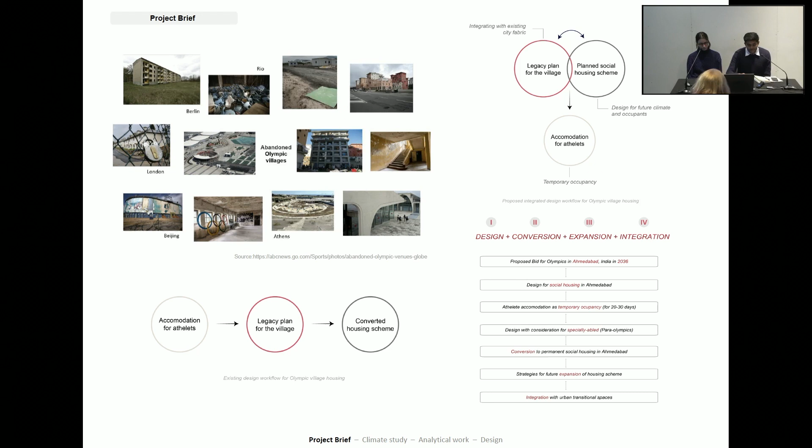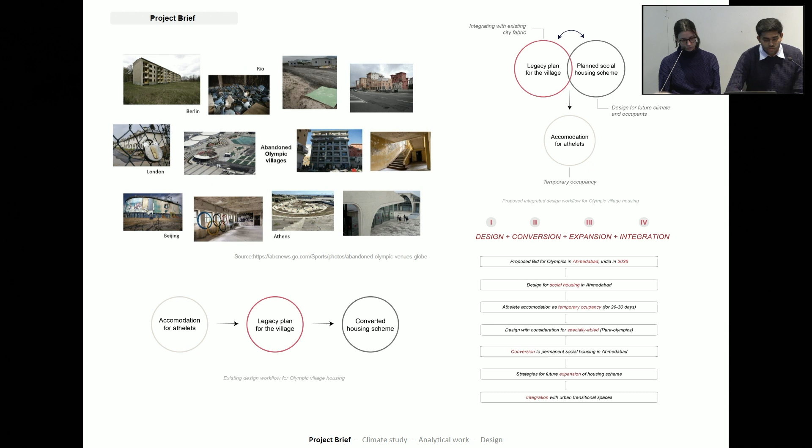I'm looking at Olympic houses as the built example of how they can be built in future, in terms of the legacy plan of the village. There have been some Olympic villages in the past which have been left abandoned post-Olympics. So I'm looking at how the legacy plan can be approached in a different way, wherein the athletes are temporary users, and the planning is mostly done for the people who will use it after the Olympics.

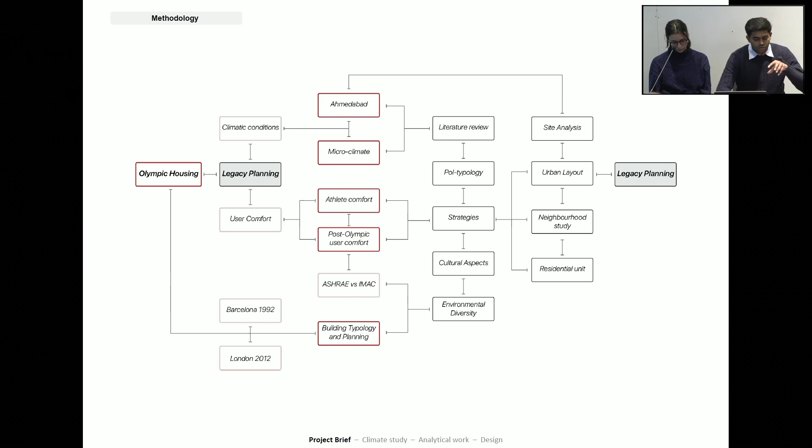So just a brief of the methodology adapted for the research work. There are two kinds of users, mainly athletes and the post-Olympics user, focusing on the urban layout for the Olympic village, going at the building level and looking at how the legacy planning can be done through the process.

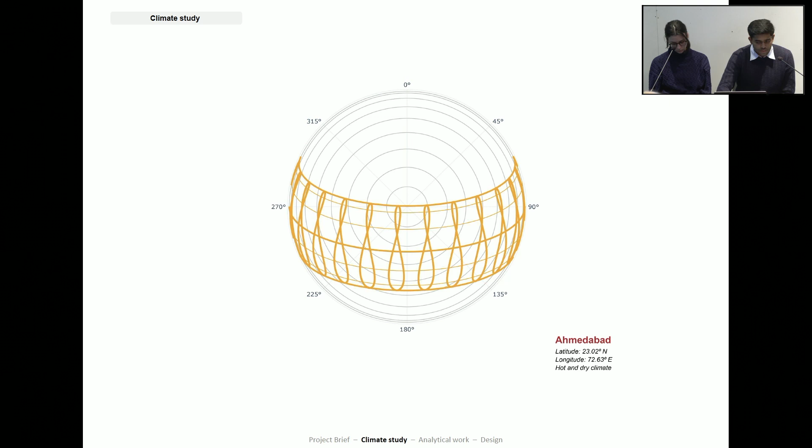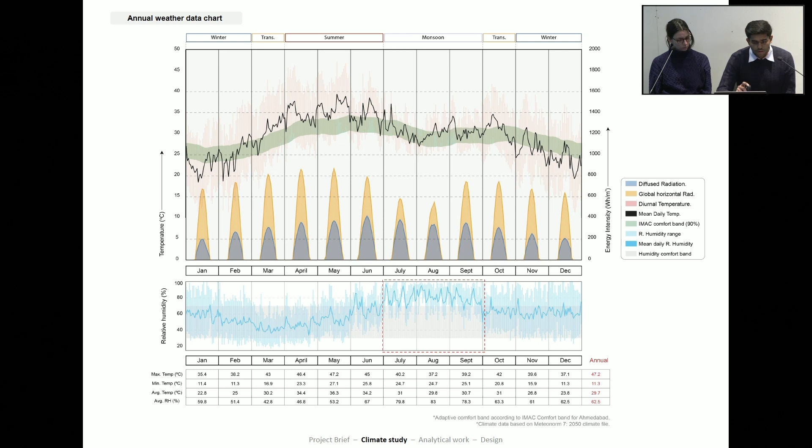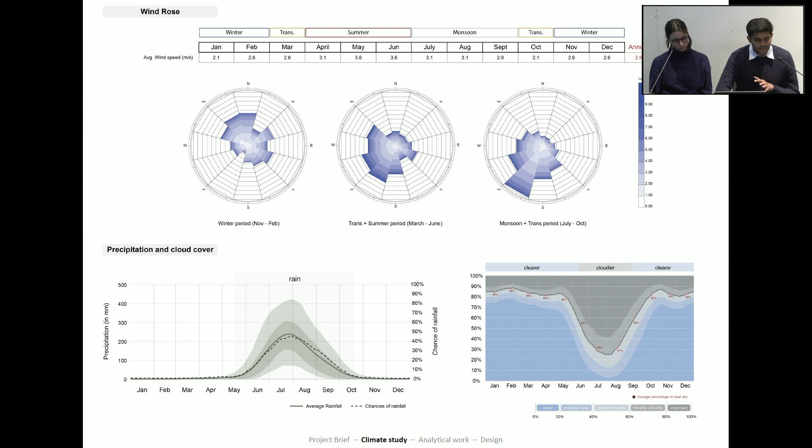The site for the Olympic village has been chosen as Ahmedabad, which is a potential site for the 2036 Olympics. The weather climate of Ahmedabad is mainly hot and dry, with peak summer temperatures during the summer period, and wind comes from the southwest direction during the monsoon and summer period. The climate can be classified into three periods: hot, mild, and moderate.

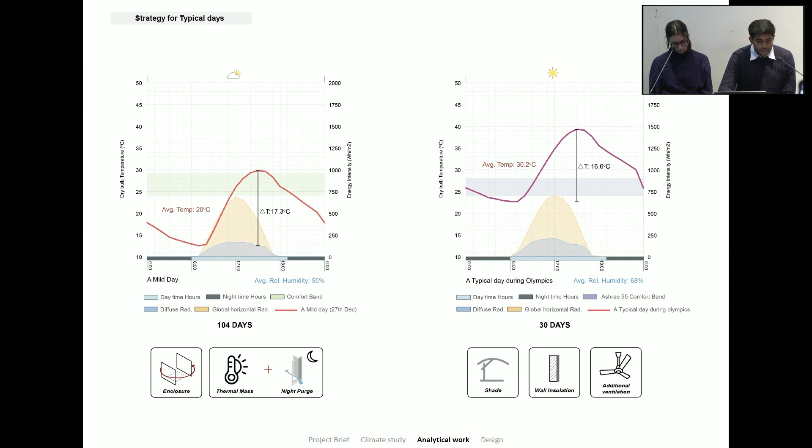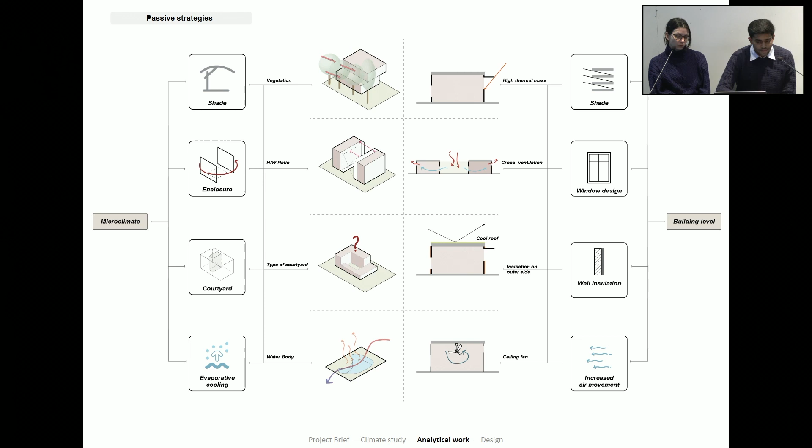For the further approach, typical days were identified for a moderate day, a hot day, and a mild day, and a typical day during the Olympic period specifically. Some passive strategies were identified through the climatic analysis of what can be done at the microclimatic level stage, then moving forward to the building level stage, with shading being an important strategy at the first stage of the design.

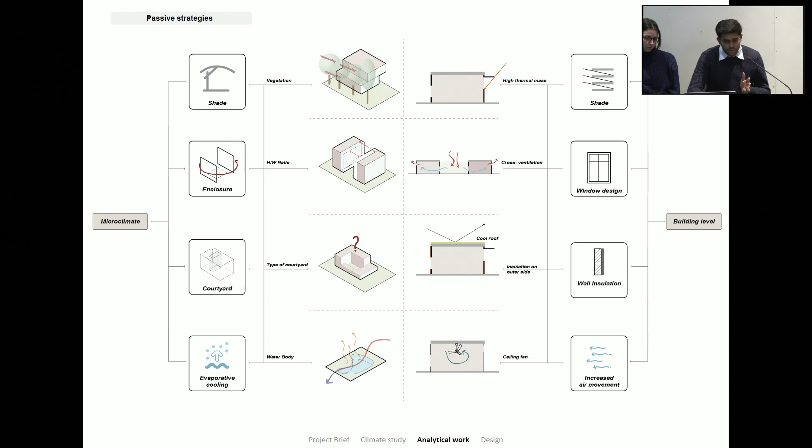Then looking at the users as the main aspect of the Olympic village. The athletes are the users who will occupy the space for a temporary period of 2 months. So I looked upon what kind of thermal environment is required for an athlete, and the wet bulb globe temperature is the scale identified for the adaptive comfort strategy for an athlete, given by the International Olympic Committee. It shows that during hot and dry periods, the performance of athletes decreases because of the high risk of thermal injuries.

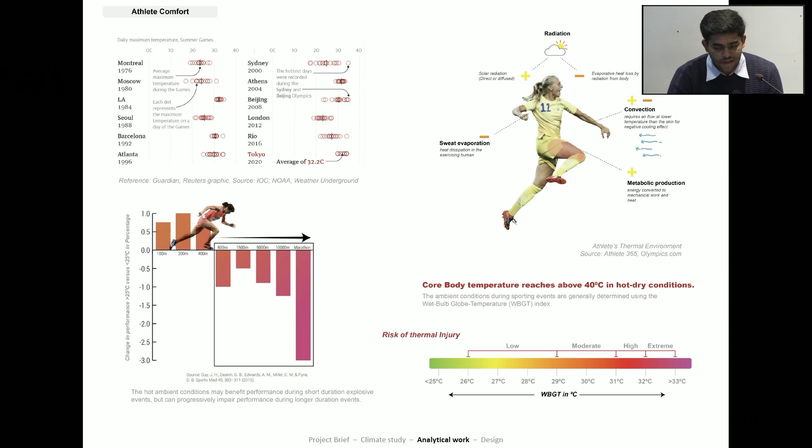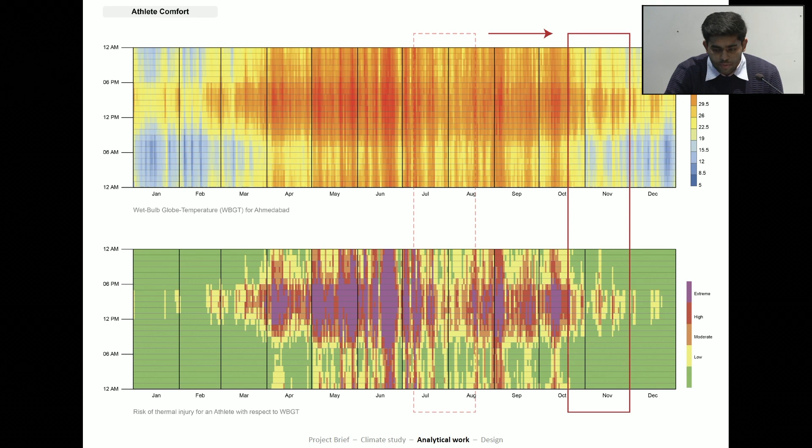I tried to plot the wet bulb globe temperature onto the Ahmedabad climate to look upon what should be the ideal period for the Olympics to take place in order to reduce the thermal risk for an athlete. It was identified that the original time period, July to August, is not a good period for the Olympics to take place in Ahmedabad, and it should be shifted to the October-November period.

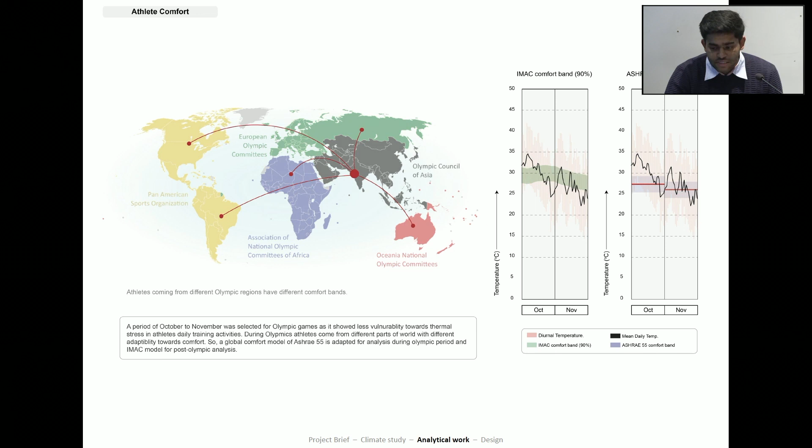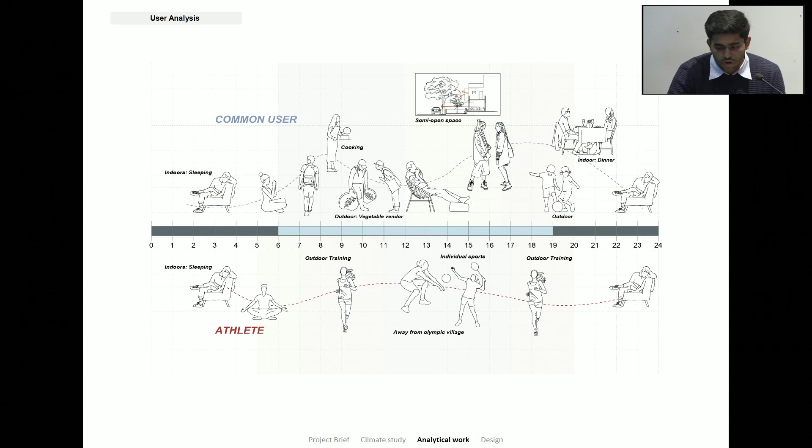In terms of indoor comfort, instead of using the IMAC comfort band, which is a peculiar comfort band for climatic conditions in India, the ASHRAE comfort band should be used, which is more of a global comfort band that people can adapt to more easily. Now moving forward into the permanent user, to identify what kind of day-to-day activities an athlete versus a common user can do, and what kind of spaces they use.

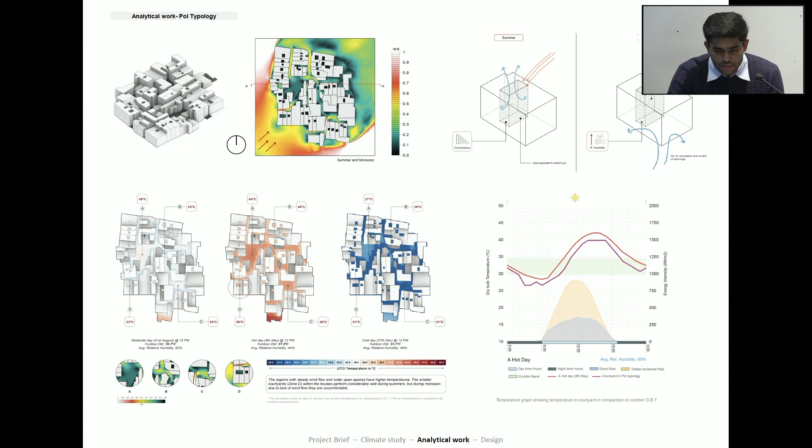So I started to look upon the morphology of the existing urban form in Ahmedabad, and tried to learn what kind of open spaces are created in Ahmedabad to guide the further steps for urban design. The main morphology of the urban form was the existence of courtyards.

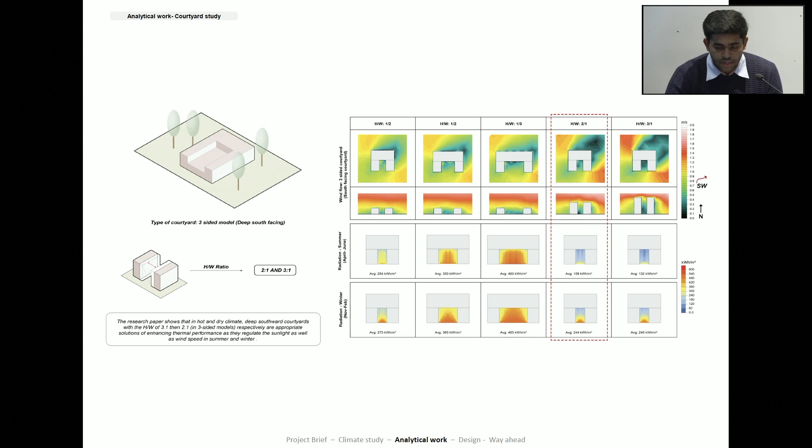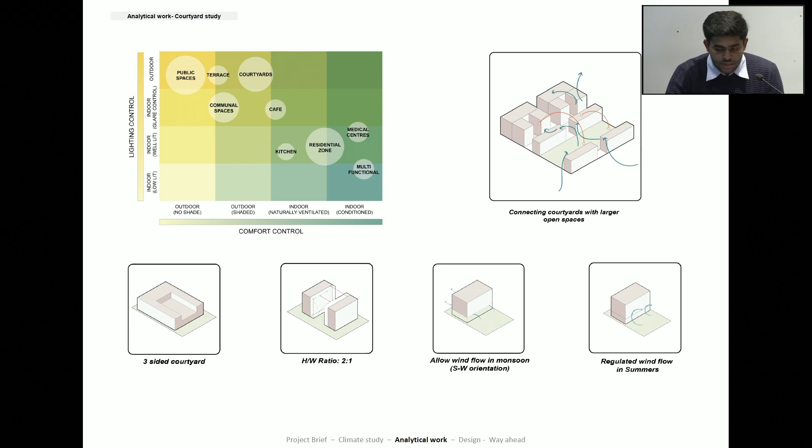So I did a brief study of courtyards, what kind of height-to-width ratio, or aspect ratio, is ideal for the climatic condition of Ahmedabad, as a courtyard is a typology which is required even during the Olympic villages. The outcome of the studies showed that a three-sided courtyard with a height-to-width ratio of 2:1 can be ideal, wherein a selective ventilation strategy between the two courtyards can be identified in order to regulate the wind flow.

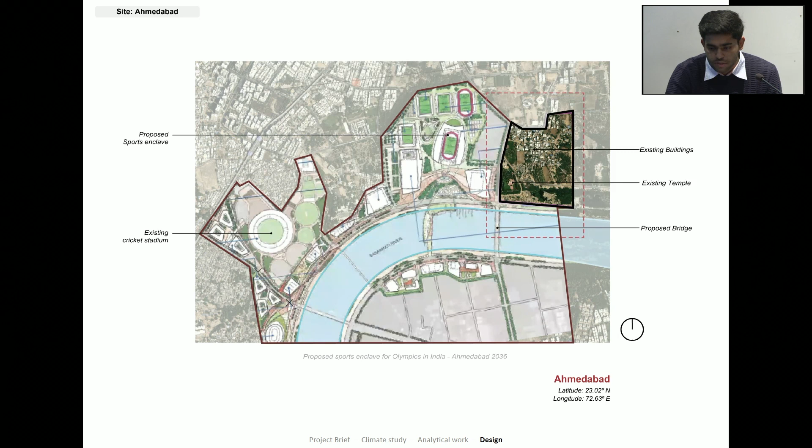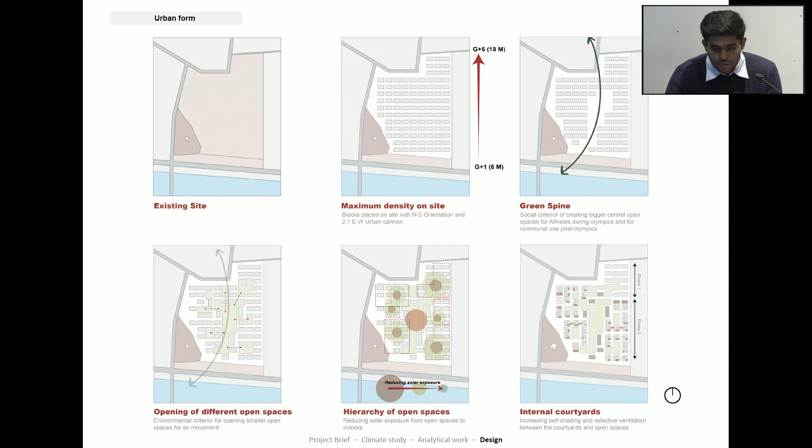So moving on to the site, which is the proposed site for the Ahmedabad 2036 Olympics. These were briefly the 6 steps identified to go ahead with the urban form on the site, wherein steps like adding a green spine, moving from larger open spaces to smaller open spaces and connecting them in order to go from higher solar exposure to lower solar exposure, and then moving to the building level, which can form smaller communities, useful during the Olympics and even post-Olympics for the communities. These were the steps identified while designing the urban form.

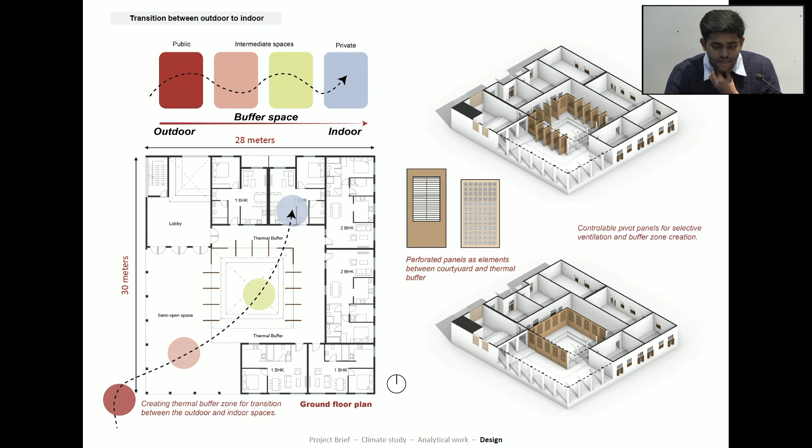Moving on to the building level, a transition space was identified going from outdoor space into the indoor space, which acts as where the courtyard and thermal buffer act as a transition in order to have a buffer between when you are entering directly from public to private space, and a use of perforated panels as an element to restrict wind flow between the buildings, and also to identify strategies for summer and monsoon.

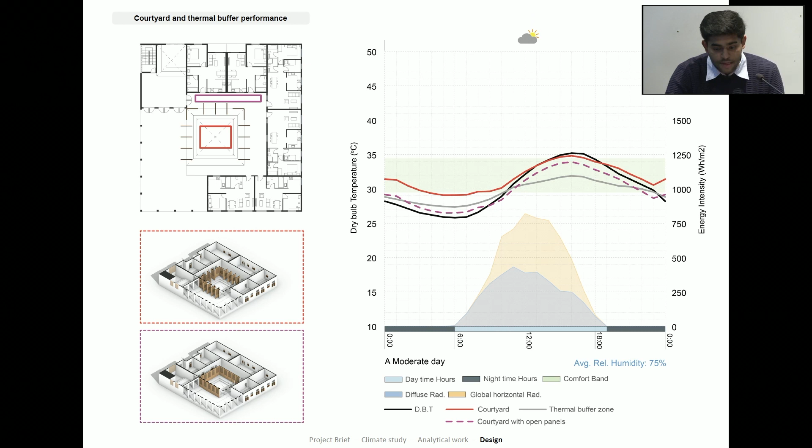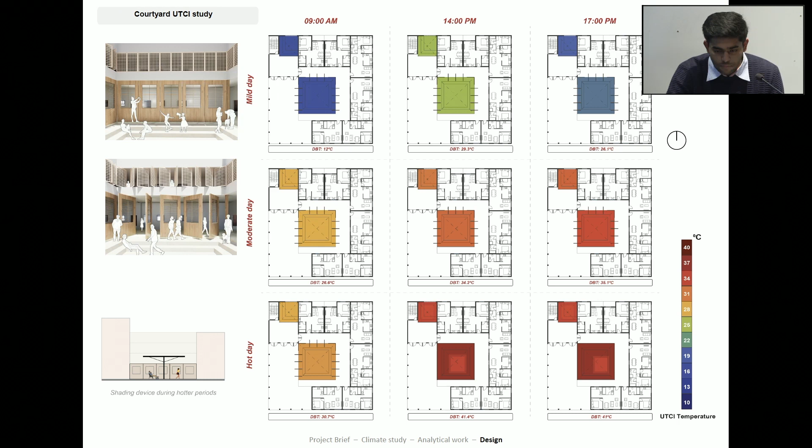A view of the thermal buffer space.

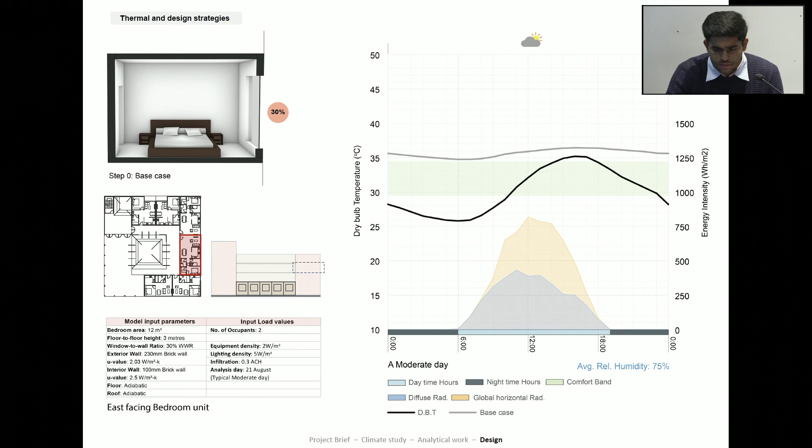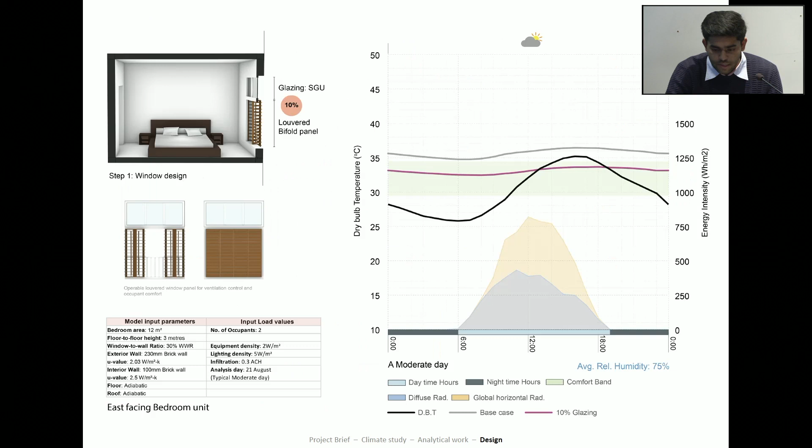Moving on to the thermal study for a bedroom space, a typical window of 30% glazing was redesigned to have panels and glazing reduced to 10%, which gives adequate daylight while reducing the temperature.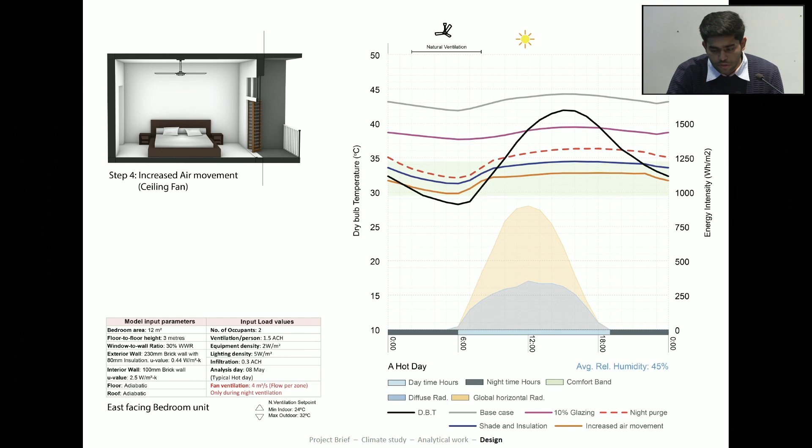Introduction of night purge with shade and insulation further reduced the temperature, and use of a ceiling fan as a mode to further bring the temperature within the comfort band, even during hotter days, was achieved.

For the apartments on the top floor, which are directly exposed to direct radiation, strategies of a filler slab and a double roof with green mat shade were used.

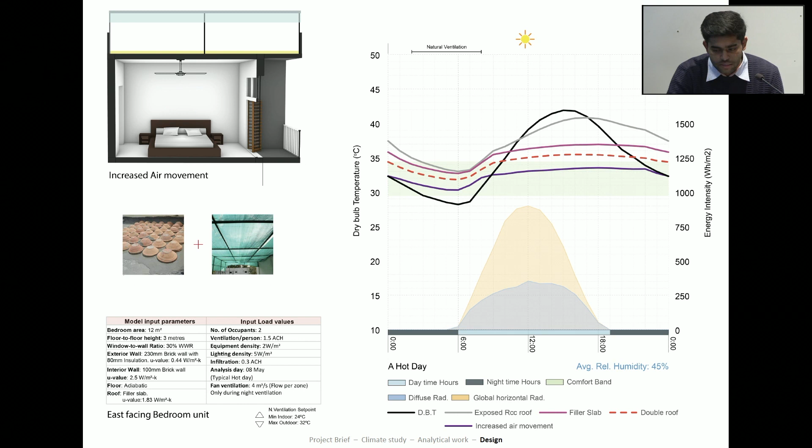This shows the whole strategy: on a moderate day the panels are opened up to allow more air, and during a hot day the panels are closed in order to block the air and maintain more comfortable temperatures in the courtyard.

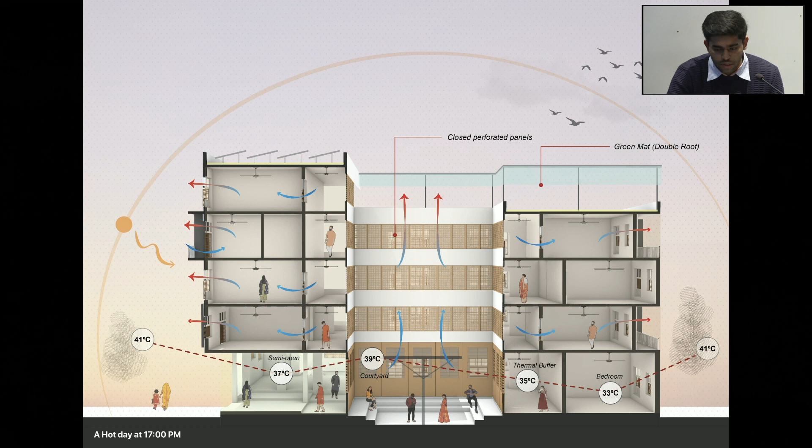And a view from the entrance of the courtyard. Thank you.

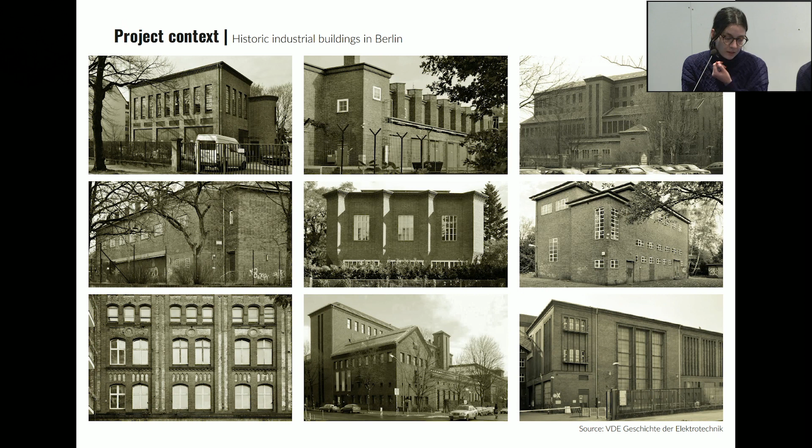On the other hand, the current market state shows a demand of approximately 700,000 dwelling units in Germany right now. While house ownership in Germany as a country is around 46%, in the capital Berlin it's only around 15%. There is a huge issue with finding housing, and something more should be done about this, and more residential projects should be constructed in the city.

The country is also tending towards smaller households, usually 1-2 people. This is the most typical size for the units. Multi-children families are not really a typical thing anymore.

When I was looking at issues regarding this building, I divided them into opportunities and issues, and also into the existing structure versus the possibility of adding new constructions. So the opportunities granted by the existing masonry buildings are...

...that they have high thermal mass and usually have high volumes which perform really well in summer, and it's a great saving on carbon emissions if we can renovate instead of construct something new.

On the other hand, we often don't have an impact on their orientation or their depth, and their fabric wasn't insulated, as these buildings were not initially planned for long-term human occupation.

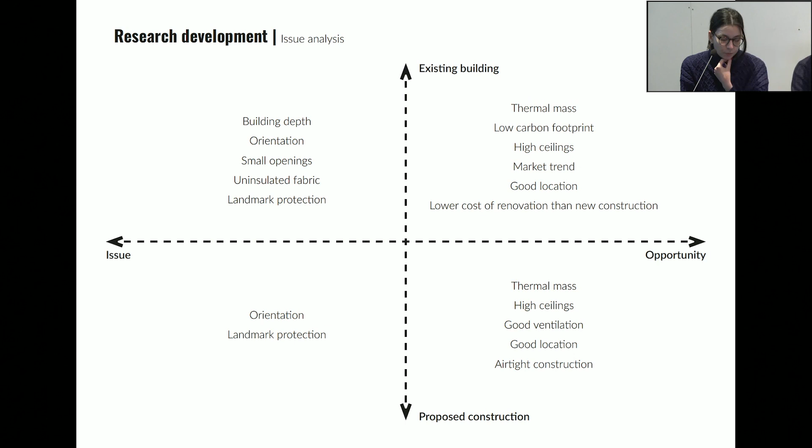So I was trying to look at how to balance the opportunities in each project, and I arrived at my research questions: how to adapt the original floor-to-ceiling height, which is usually very large, up to 6 meters; what major interventions are worth pursuing if we were to go against the law that limits intervention; and how to adapt those buildings to be as energy efficient as possible in a cold climate.

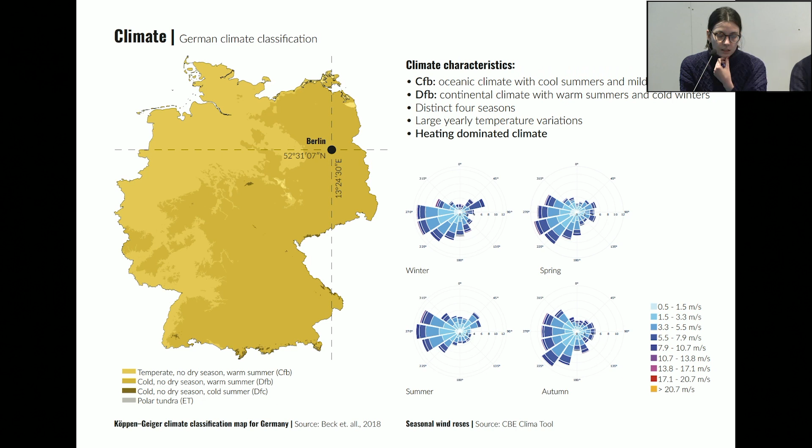I chose 2 typical weeks, a typical winter week and typical summer week, but also really wanted to see how the building would perform during extreme conditions: a very cold week, as well as a heat wave, which is particularly dangerous for buildings that have very high thermal mass.

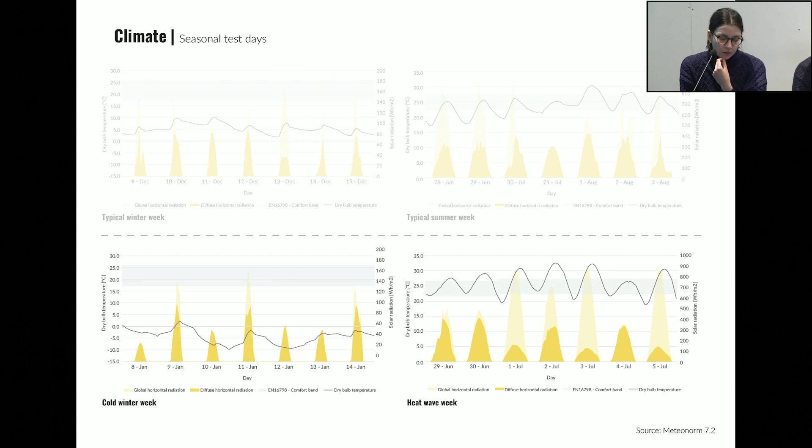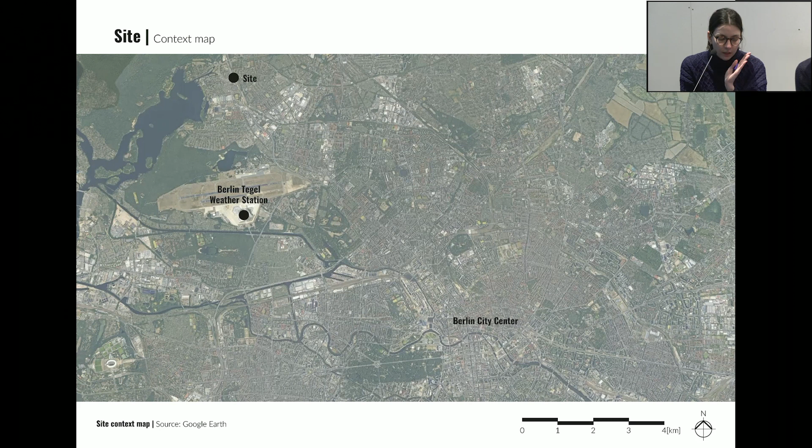This is the map of Berlin. The city center is marked, as well as the weather station that was used for deriving all the weather files, and the site itself. This is the proximity of the building.

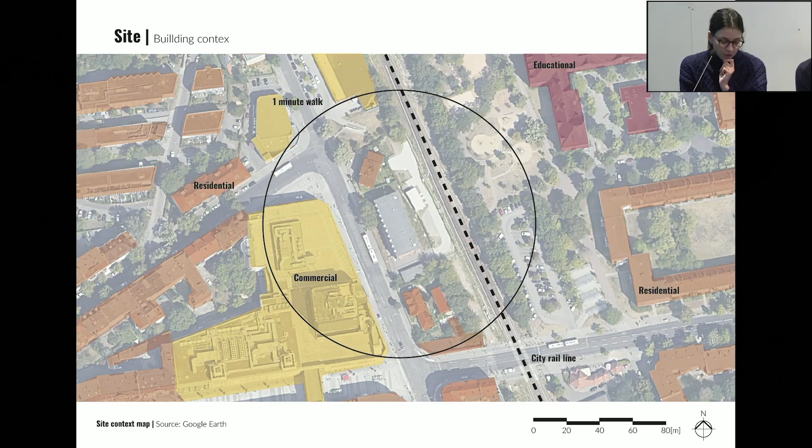The building, this is the site. The building is currently owned by the city rail and is still operational.

I suggested leaving the ground floor as an open rental space, keeping the spirit of the street, which is mixed use, and putting the trash enclosure and back storage in an ancillary building, while providing an acoustic screen with greenery as protection from the noise pollution from the rail.

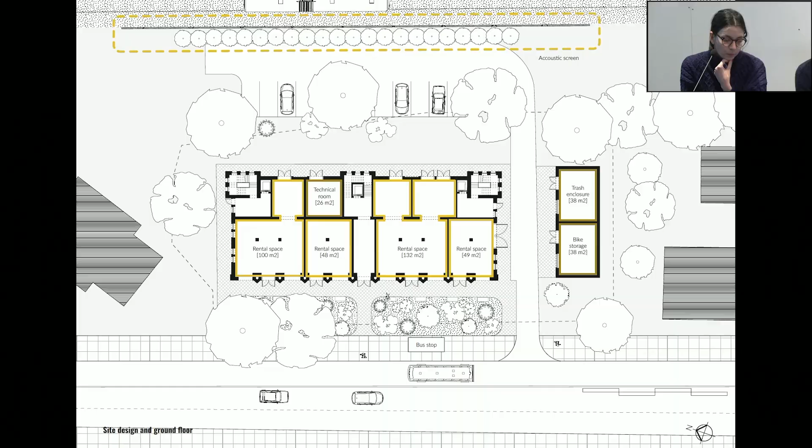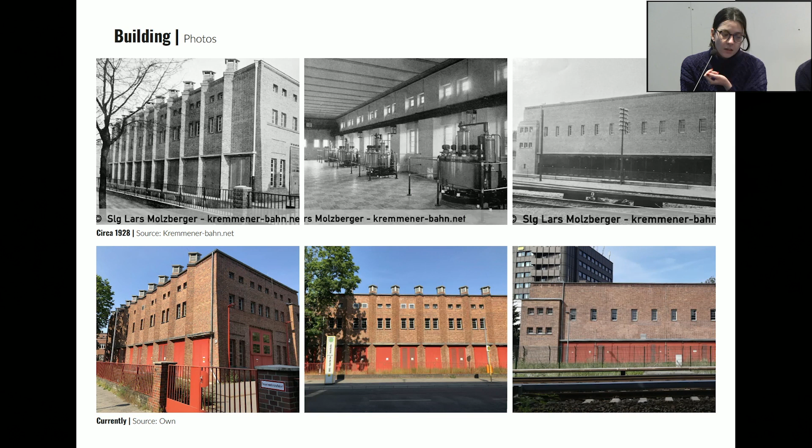This is the building itself. It's a rectifier plant and still serves as such. It was constructed in 1928 by architect Richard Brademann, who is the main architect of the Berlin City Rail.

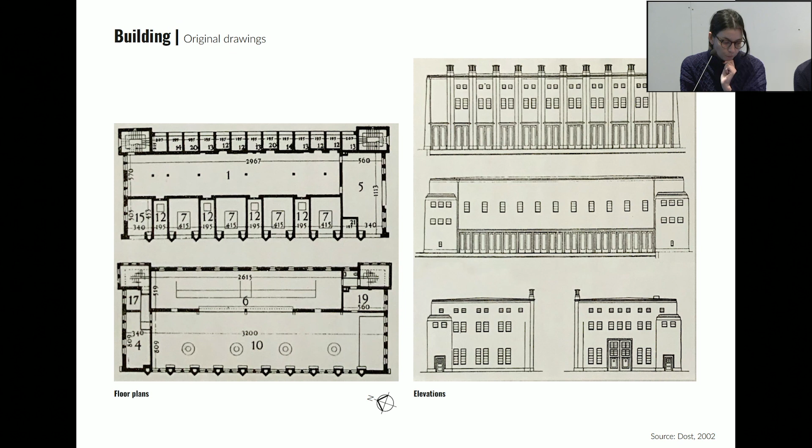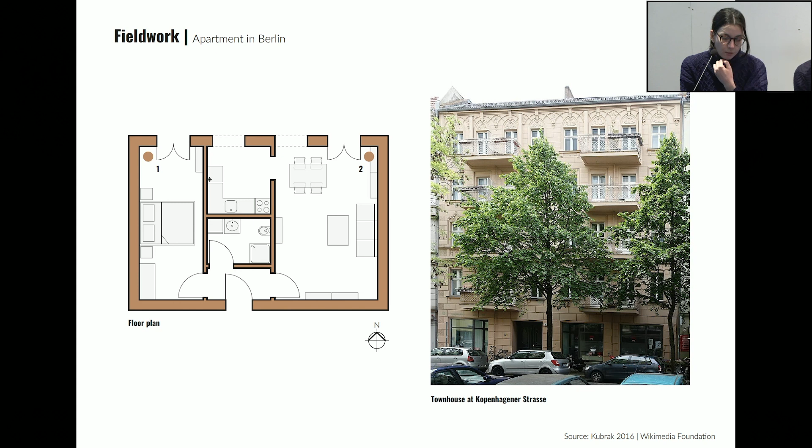As part of my fieldwork in Berlin, I also wanted to learn about what constitutes a good apartment. I had an opportunity to study a townhouse constructed also in the beginning of the 20th century.

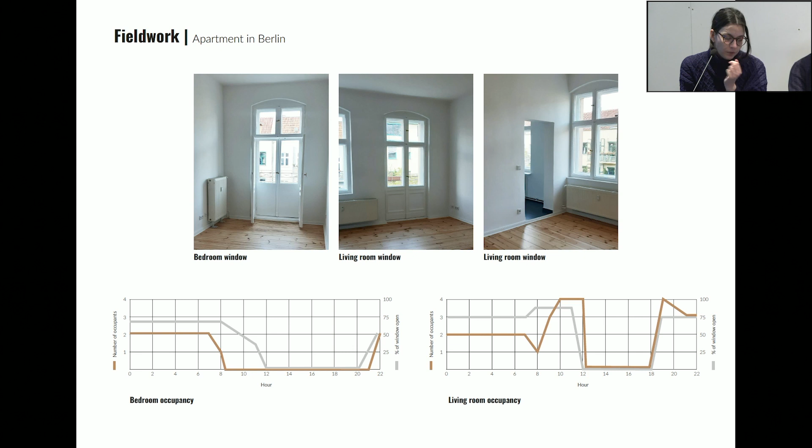Over a hot summer week, I installed 2 data loggers, one in the bedroom and one in the living room. These are the 2 charts showing occupancy patterns of the rooms.

I discovered that despite outdoor temperatures being very, very high, the temperature inside remained really comfortable. The building was also constructed of solid masonry and has floor-to-ceiling heights of approximately 3.3 meters.

My takeaways were that the high ceilings and no direct solar gains really contribute to keeping the temperature inside comfortable during a heat wave. I also noticed that the balcony in the apartment served as a really nice transitional space during that time.

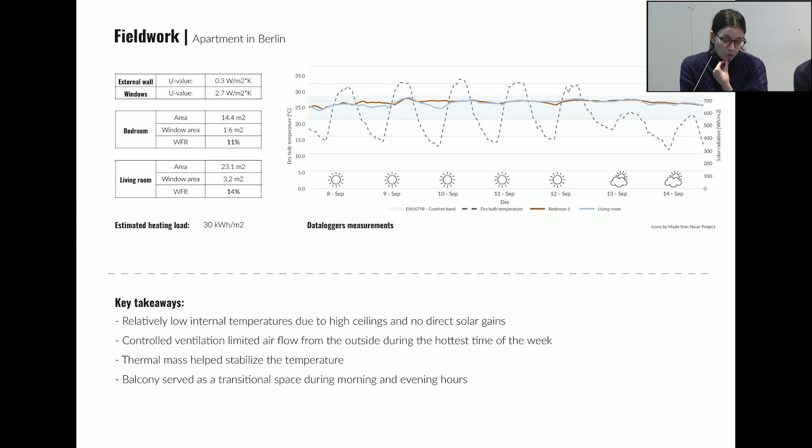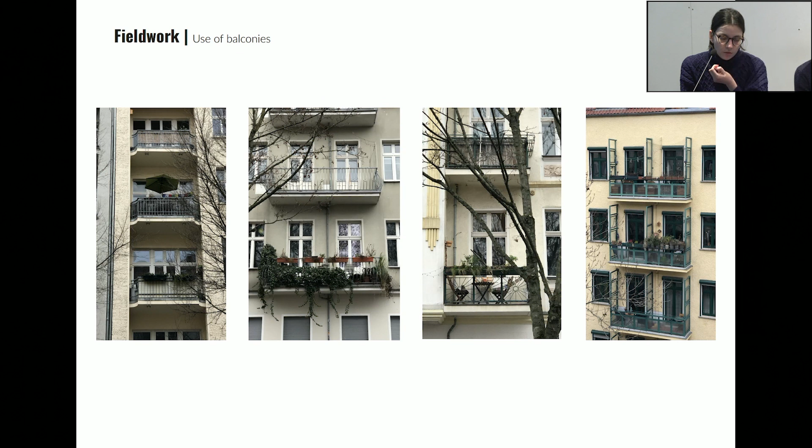I really wanted to focus on balconies and transitional spaces in Berlin because they are beloved. So during the fieldwork, I also took a walk around the city to photograph and see how people are using their balconies. Regardless of building orientation, they are very, very popular and used throughout the year.

I arrived at my design agenda, which was preserving the front elevation, which has really nice architectural value and is characterized by those ventilation shafts, and preserving the existing staircases.

But then the additional balconies were really only possible on the back elevation. So that was also one of the key things.

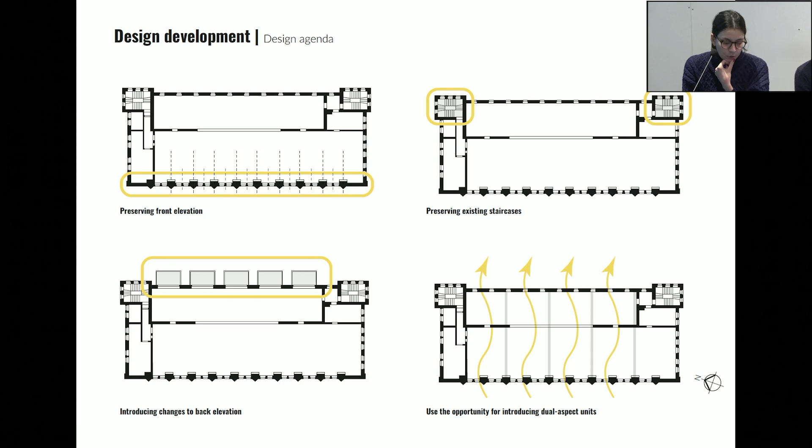I wanted to focus on introducing dual aspect units, and I set up my comfort criteria. In terms of daylighting, it's pretty lenient, around 100 to 150 lux, and temperature relies on the adaptive comfort band.

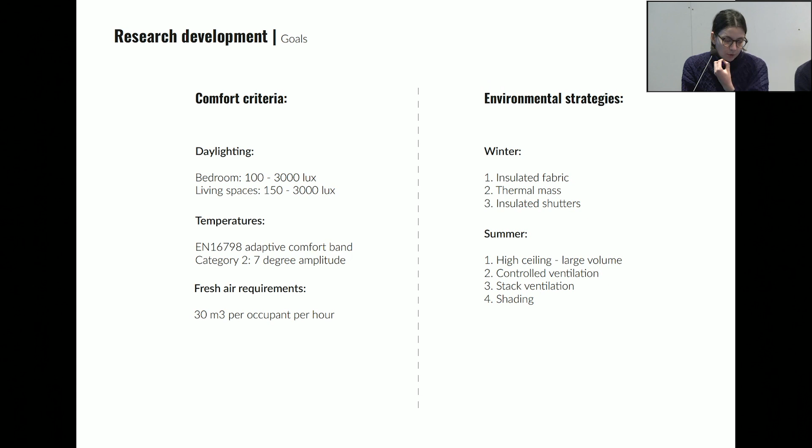From my analytical studies, I wanted to look at how different units are performing depending on their orientation, and I discovered that a double aspect unit always performs better in terms of heating load than single aspect units of a similar size.

I followed this up by studying a unit on an intermediate level as compared to a top level, to discover that addition of top floors could be beneficial for the thermal performance of the building.

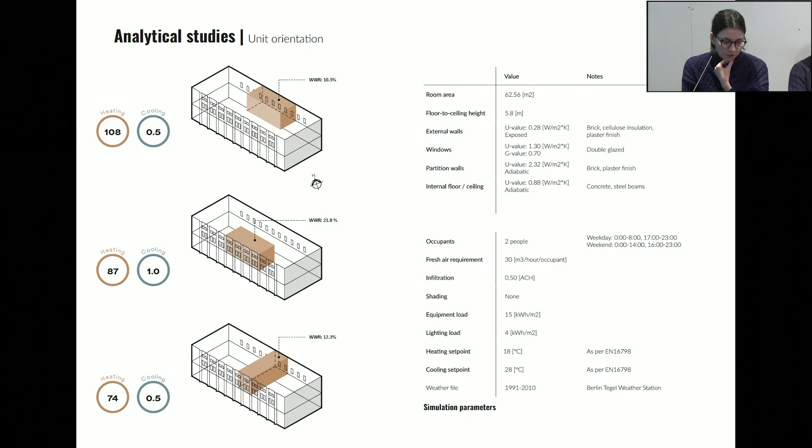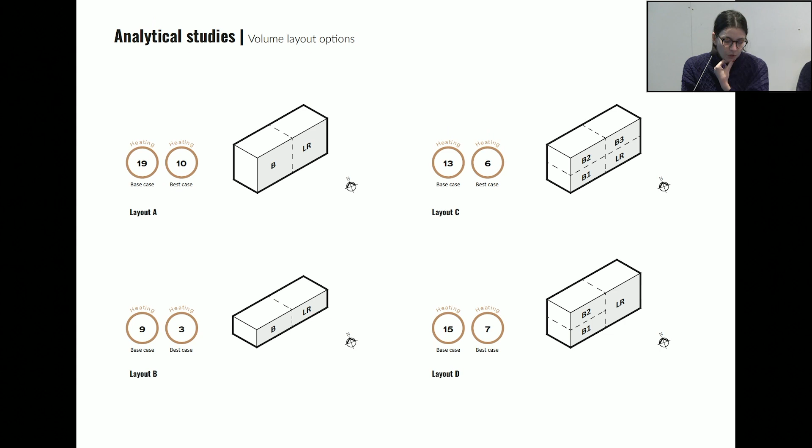Second part of my analytical studies focused on how to deal with the height of the floor, which is 5.8 meters. I studied 4 different possible volumetric layouts for a unit, ones that either employ the full height, only half height, or mixed solutions, and I arrived at the solution that layout D with mixed heights of rooms could be a good idea to pursue.

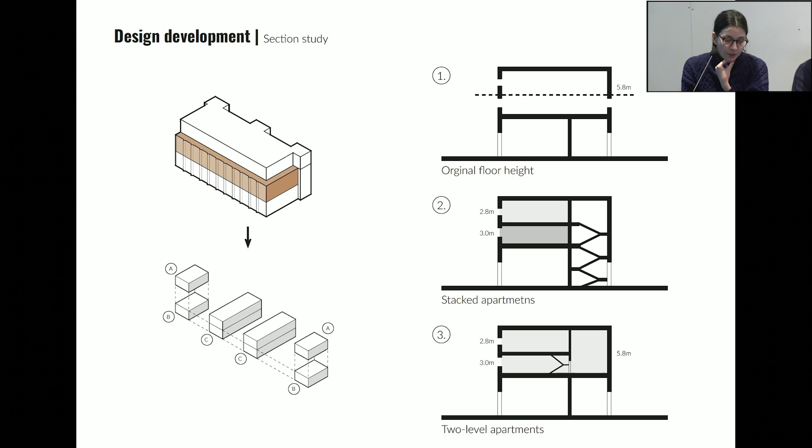This is how I decided to go about adding to the volume of the building, adding of the staircases, and adding of a top floor. In terms of dealing with the section, we'll be both having stacked apartments of lower heights and having 2-level apartments. This is the program of the building.

It has 17 units, out of which 4 are 2-bedroom plus office apartments that are double height. There are also studios and 1-bedroom apartments, so they cater to different occupant groups.

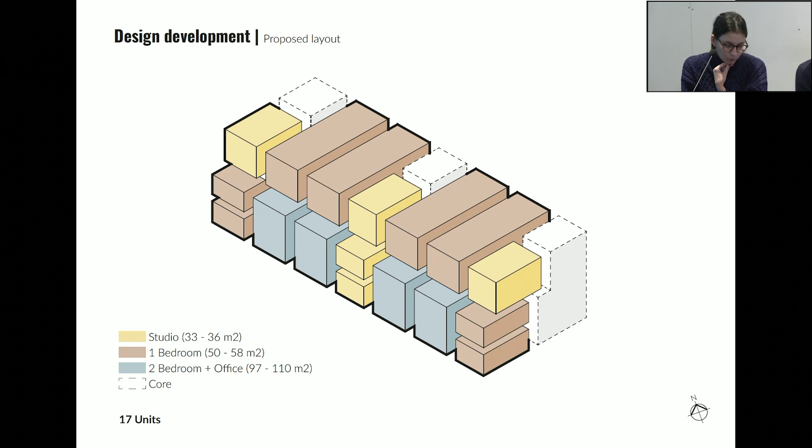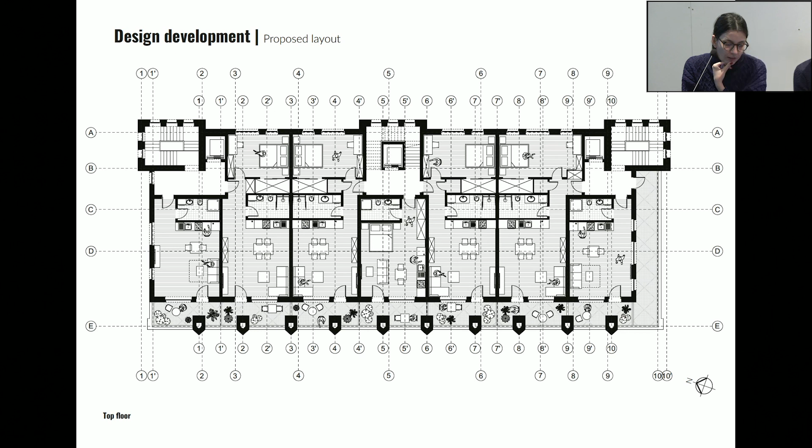The opening of the back elevation constitutes a challenge because it is a northeastern elevation. From a thermal analysis point of view, it's not really desired. On the other hand, the compactness of the plan and the thermal performance I thought was good enough to justify such a move.

The benefits were significantly better daylighting and the inclusion of balconies, which will serve as a great space in summer when they will also be shaded from direct sunlight.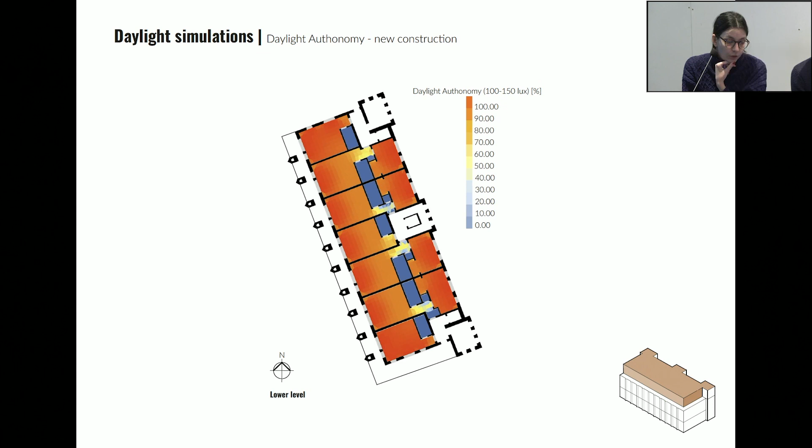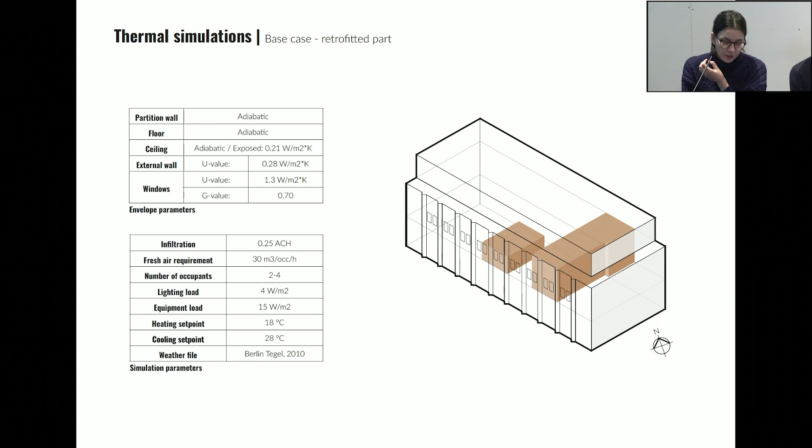In terms of thermal analysis, I really focused on 2 extreme cases, the smallest and the biggest unit. In the existing part, I started with values recommended by current German building regulations, which are 0.28 U value for the external wall and 0.21 U value for the roof. I studied how different rooms performed during winter and during summer.

While the studio remained inside the comfort band for most of the time, the living room and the bedroom obviously had much higher heating demands. The bedroom located to the southwest was responsive to solar gains and also had higher internal temperatures, while the large living room performed pretty flat and was much more stable in terms of temperature.

In summer, there was some overheating during the heat wave, so that was also something I wanted to mitigate, especially in compact studios directed to the southwest.

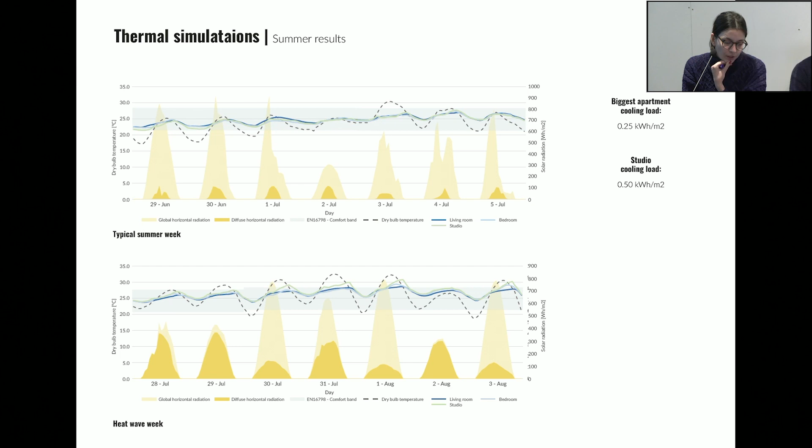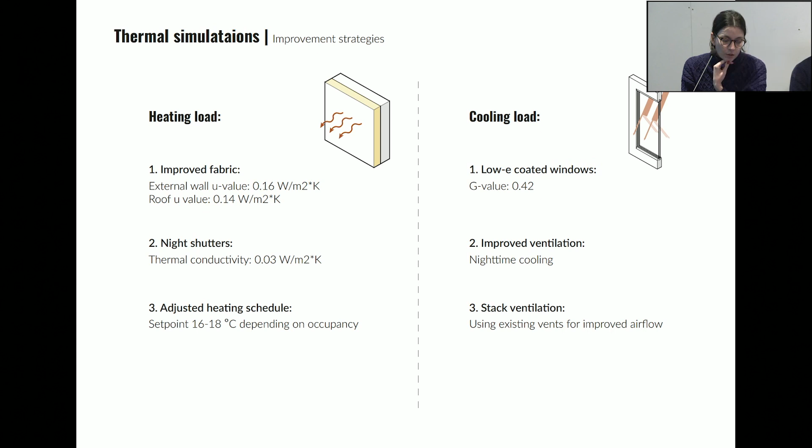I focused on both winter and summer strategies for improving the performance. For winter, it will be improved fabric, including night shutters, and also adjusting heat, including variable heating schedule. For summer, low-E coated windows, improved ventilation, and also using the existing ventilation shafts for stack ventilation.

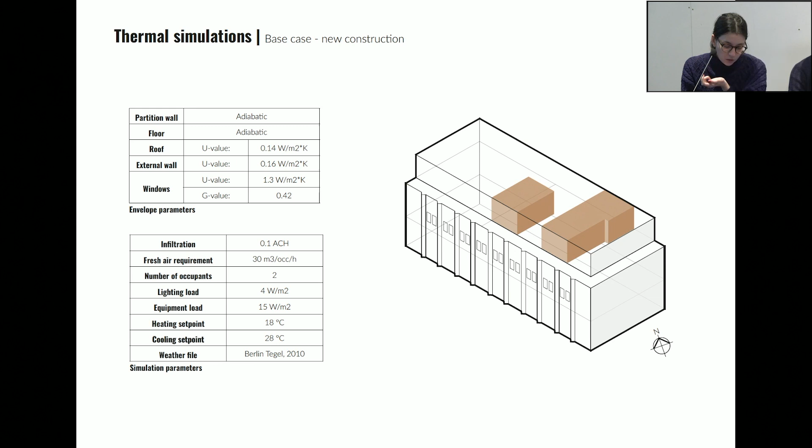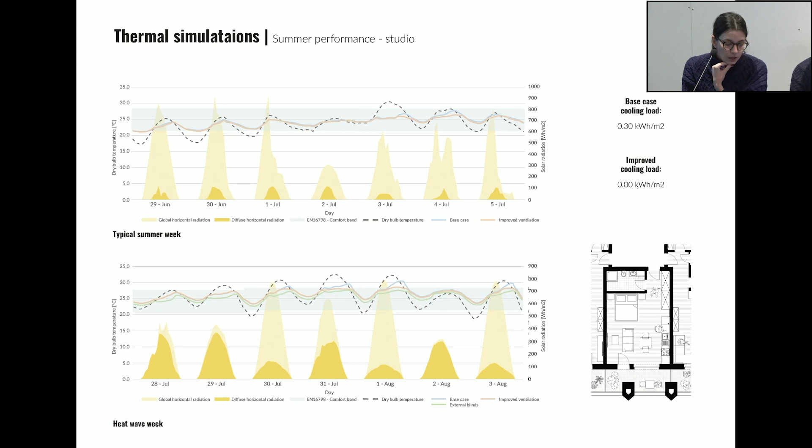For the new construction, I conducted the same round of simulations. Here are the results with all the improvements. During summer, I also decided to include external blinds as a shading device, and they were tremendously helpful in lowering internal temperatures during a heat wave week.

The tables show the summary of simulated heating and cooling loads for the base case scenario, which is the German regulation fabric properties, improved fabric qualities, and also predictions for the year 2100. I was very happy to see that in almost half of the cases, I was able to achieve a heating and cooling load close to 0.